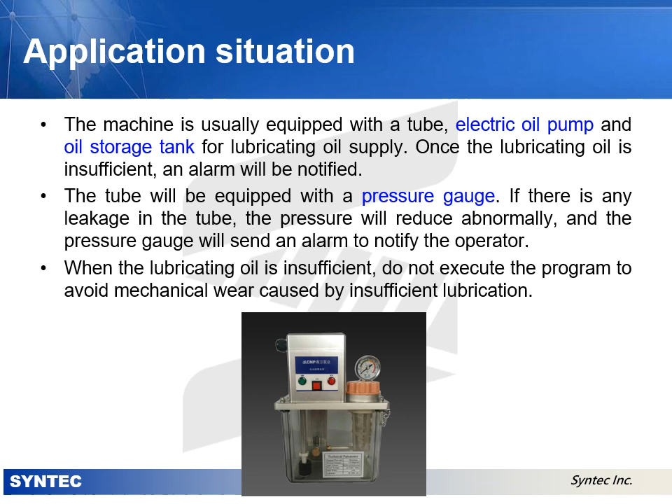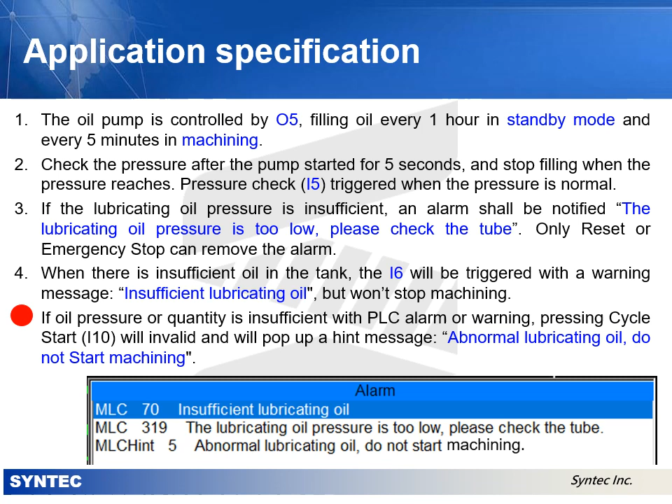When the oil quantity in the oil tank is not enough, a warning will be notified. If the program is during machining, it won't be interrupted. Once an alarm or warning appears in the standby state, machining cannot be conducted. If the cycle start button is pressed, a hint message will appear.

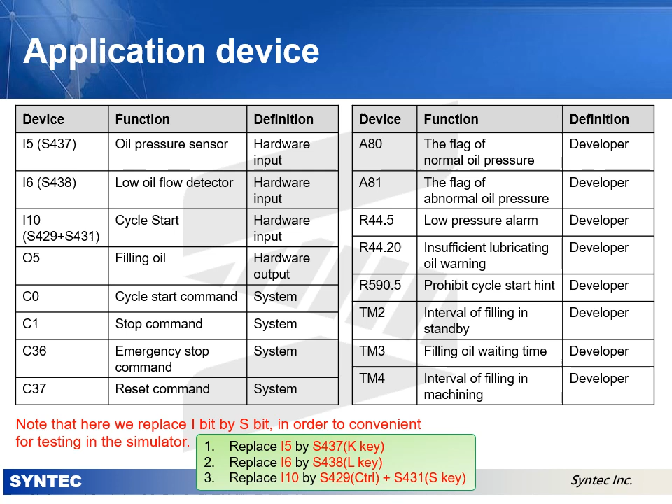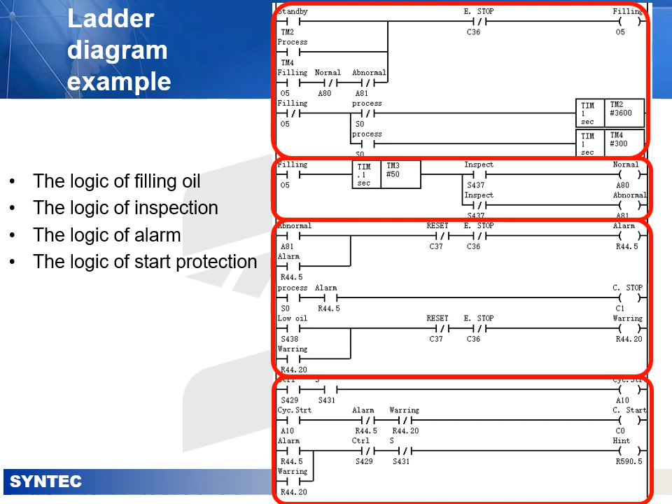Application device. Here is a total device which we used to apply in this example. Note that here we replace I bit by S bit in order to be convenient for testing in the simulator. This example can be divided into 4 logic: filling oil, inspection, alarm, and start protection. The following video will have a detailed introduction.

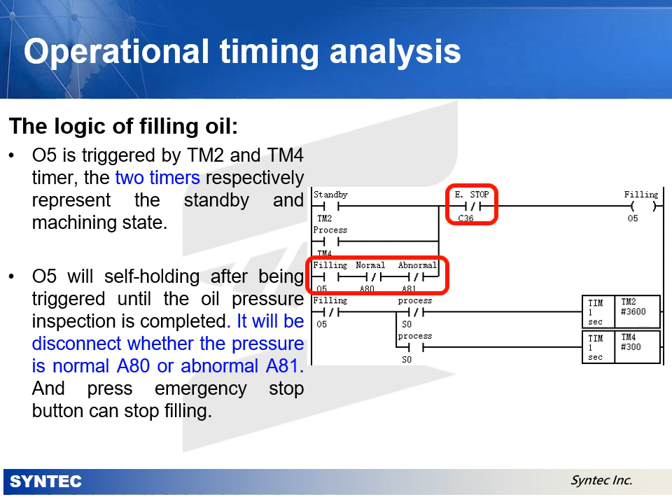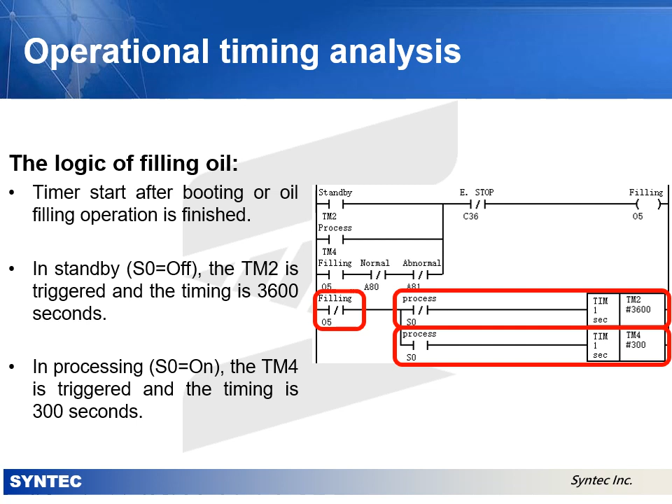The logic of filling oil. The pump can be started by output O5 under the 2 conditions which are standby and machining timer. When the O5 is triggered, it will be self-holding until the end of the inspection, or pressing the emergency stop. 2 timers are triggered after the pump stops filling under the condition of whether the S0 is triggered or not. Therefore, only 1 timer will be triggered. The timing time is 3,600 seconds and 300 seconds respectively.

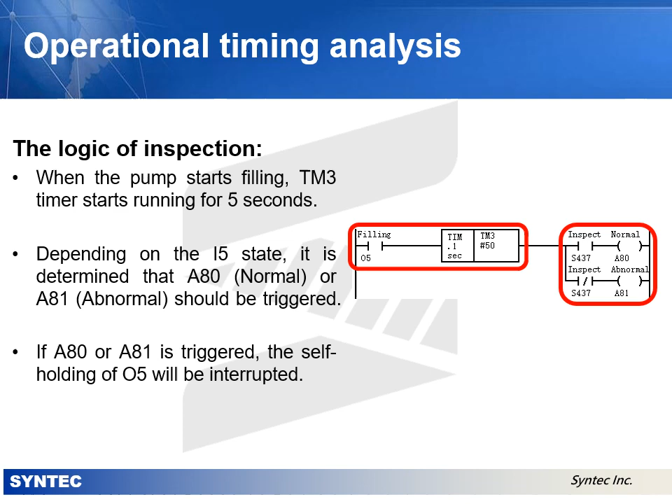The logic of inspection. Once the pump starts filling, the timer will start to run for 5 seconds before the oil pressure sensor inspection. Normal and abnormal pressure will trigger A80 and A81, respectively. Both outputs interrupt O5 self-holding and stop pump filling.

The logic of alarm. When the oil pressure is abnormal and A81 is triggered, an alarm R44.5 is triggered immediately and uses self-holding to notify the user. If this alarm happens during the machining, it will trigger C1 to stop machining to avoid that the lubricating oil is not enough. In addition, once the oil quantity is insufficient, the R44.20 warning notice will be triggered, which is also self-holding.

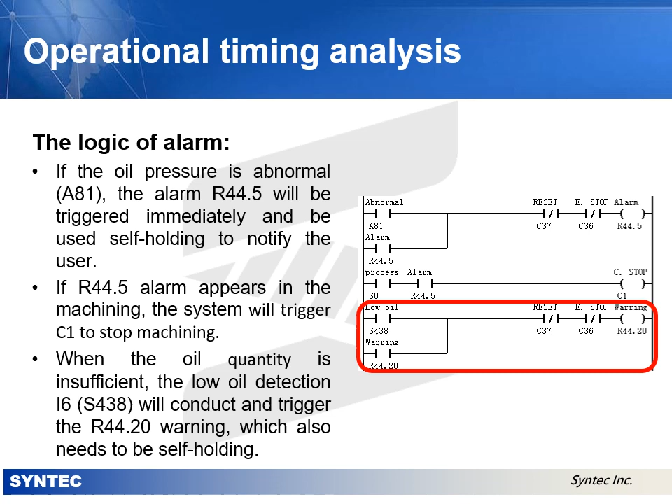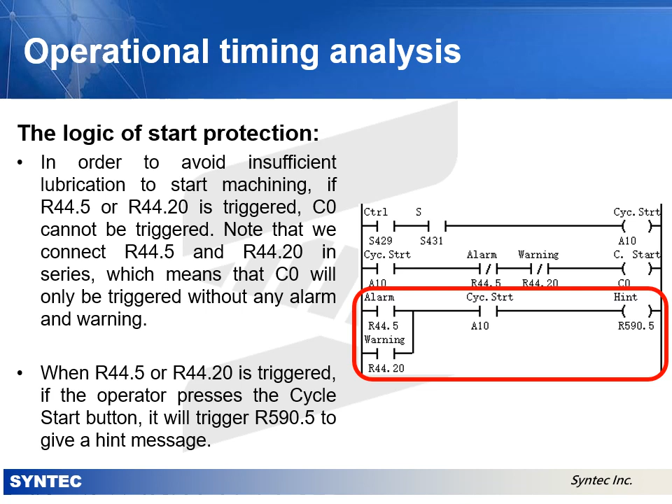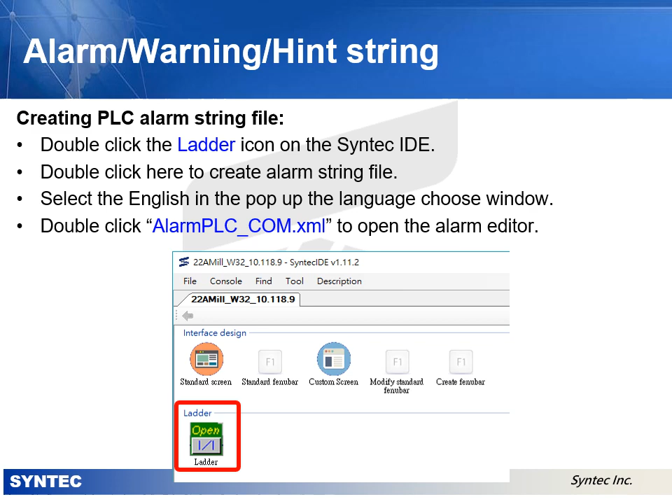PLC alarm, warning and hint string. The new version of Syntec IDE can create the PLC alarm string file in the project directly. First of all, double-click the ladder icon on the Syntec IDE. Secondly, double-click here to create the alarm string file. Thirdly, select English in the pop-up language choose window.

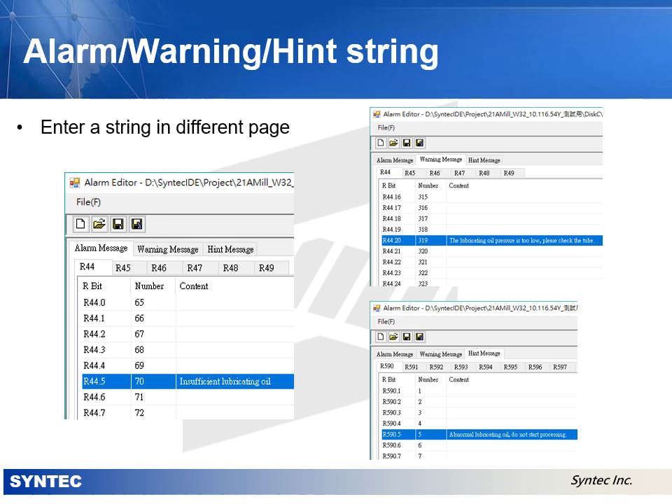Finally, double-click the PLC alarm string file to open the alarm editor. By selecting different pages in the alarm editor, PLC alarm, warning, and hint string can be edited separately.

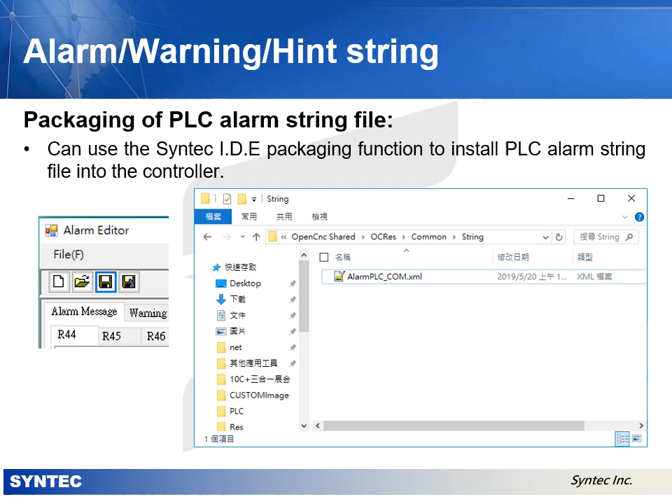Packaging of PLC alarm string file. After editing and saving, the file is stored under the project. In addition, we can use the Syntec IDE packaging function to install the PLC alarm string file into the controller. When an alarm is triggered on the simulator or controller, an alarm window pops up. Note that only the alarm will remain in the history record.